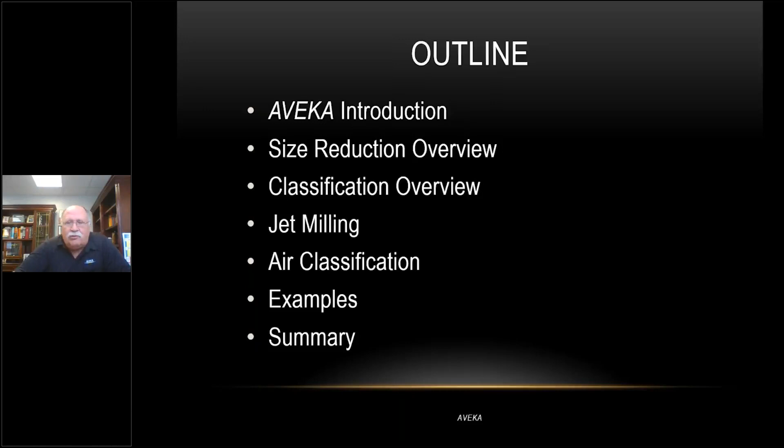So to get started, let's see if we can get to it. I'm going to give you just this outline. I'll talk a little bit about Aveka, just to give you more information about what we do, and why we're giving this talk. I'll give an overview of size reduction, an overview of classification. We're going to specifically talk about jet milling and air classification, and then I've got lots of examples for you to give you some idea of the secrets and tricks to get to those ultrafine particles that we're all interested in. So let's get started here.

Aveka Group, where I'm located right now, as Kevin said, we are a particle technology company that does contract manufacturing. We started in 1994, and typically in a year we'll have 300 customers in all of these areas, from chemicals to ceramics to aerospace to food. We focus on unit operations in our contract manufacturing and development processes.

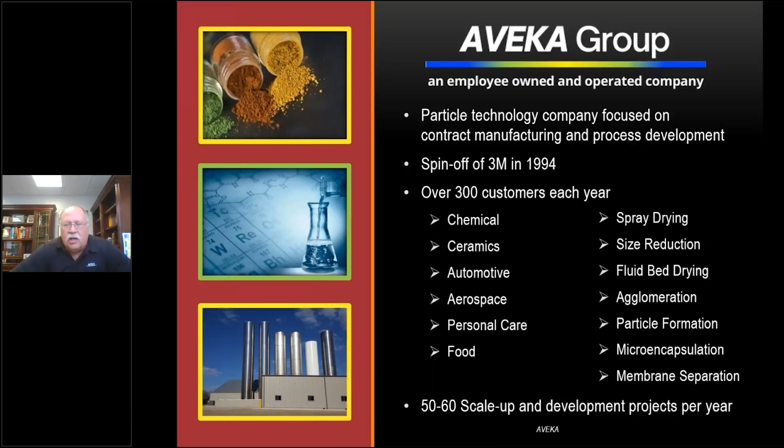Things like spray drying, size reduction—one of the parts we're going to talk about today—agglomeration, microencapsulation, membrane separation. Not only do we do contract manufacturing, but we also do scale up and process development projects. So many companies come to us and ask, how do I do this? What's the best way to do this? How can I optimize my process? So let's get started then.

Let's get right into this short overview of size reduction. We're going to be focusing today on jet milling, but realistically, there are lots of different ways of doing size reduction. If you've got big particles, rocks that you might want to start with, you're going to crush them. There's ball milling, hammer milling, and if we really want to get to the ultrafine particles, here's one of the secrets: jet milling gets you partway there, but bead milling, a wet process, would get you all the way there. Maybe in the future, I'll give another talk on bead milling.

When you're really looking at what process you want to pick and how you want to do it, it's all about a number of factors—what's the input size?

Obviously, I don't want to put a bowling ball into a bead mill—it doesn't work. What's my final size? Obviously, I'm not going to make submicron particles with a hammer mill. And what are the distributions, energy efficiencies, and size distribution efficiencies?

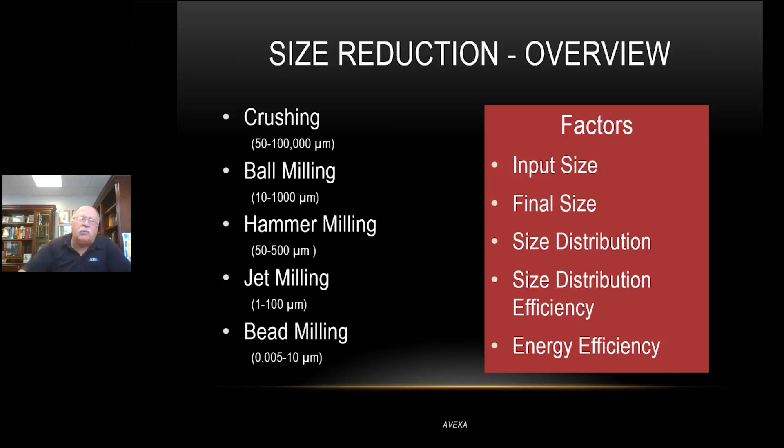Now, one thing I want to point out about size reduction—maybe most of you know this—is that it's an incredibly inefficient process. Maybe 2 to 4% of the total energy you put into grinding something actually goes into breaking particles. The rest goes into heat, into friction, or is just vanished into the ether.

This is a really interesting issue. So anything we can do to increase the energy efficiency from 2% to 4%—this is a huge increase. Doing this right makes a lot of sense.

In 1867, von Rittinger first came up with the idea of the theoretical amount of energy needed to do this, and he proposed Rittinger's law. That's the change in energy with respect to change in particle size, which comes up to basically a power law, and it really ends up relating to the increase in surface area. So Rittinger's law did a good job of explaining energy efficiency and usage.

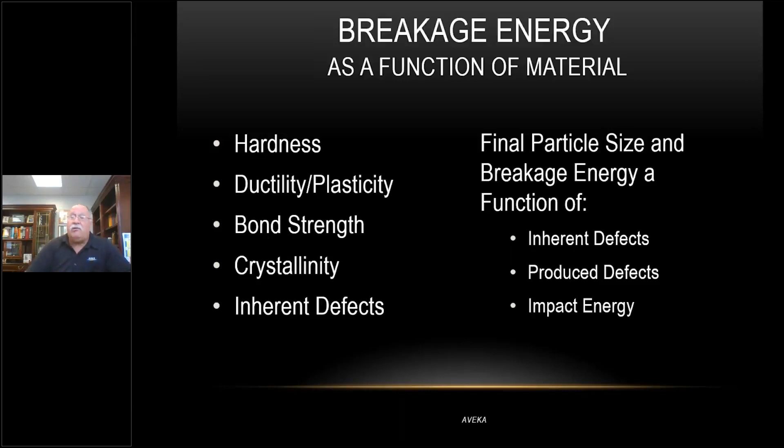Now, classification is one of these processes that goes hand in glove with particle breakage. I think we all know that when you break a particle, you don't necessarily get it broken into nice even pieces—it breaks into a wide variety of sizes. Many times those sizes are too small, and you're going to need to classify them out. So typically with most grinding processes, there's going to be a classification process that goes with it.

The way air classification works, it's all about balancing airflow against drag, combined with the offsetting effects of all these attractive forces, whether it's gravity, electrostatics, van der Waals, or magnetics. We're trying to balance all this out to separate these particles.

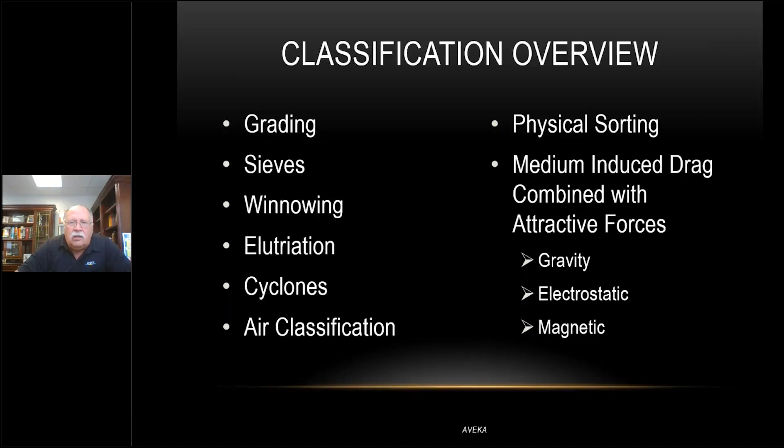One of the things we know about classification is it's not a very perfect process. Let's just call it that. When we use screens, even those aren't perfect, but with air classification, the efficiency depends on the classifier that you use and the materials you use.

Here's an example of jet milling followed by classification that we did on silica. What you can see is, depending on the rotor speed of the classifier, you can move to different size particles, from one size down to the other, by changing that rotational speed.

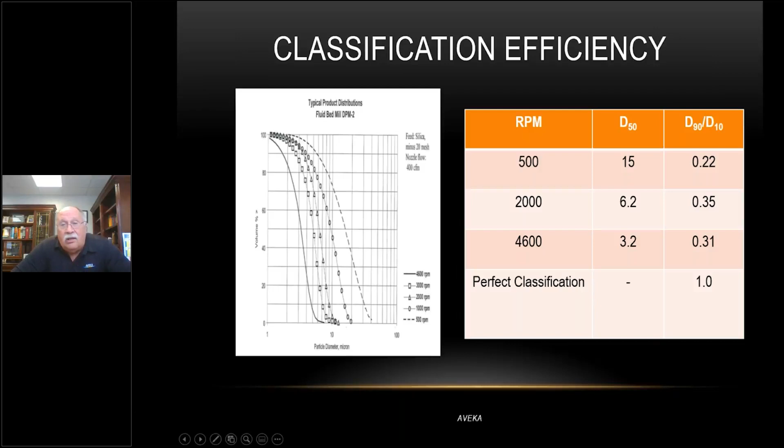The efficiency is defined as D10 over D90. The closer that number is to 1, the tighter the distribution, the sharper the peak in the particle size. If you have perfect classification, where everything is either above or below a number, you'd have a D10 over D90 of 1. We'll never see that. You can see numbers like 0.3, 0.2. This is not a great classification, but for this particular product, this is what we actually got.

So let's take a look at the jet mill types we're going to be talking about today. Jet mills are not a new technology, but they're not ancient either. They were first invented and proposed in 1917, looking at opposed jet milling, basically shooting particles at each other directly, using high pressure steam or air. In 1934, fluid beds were invented along with pancake mills, and finally Ovaljets in 1940.

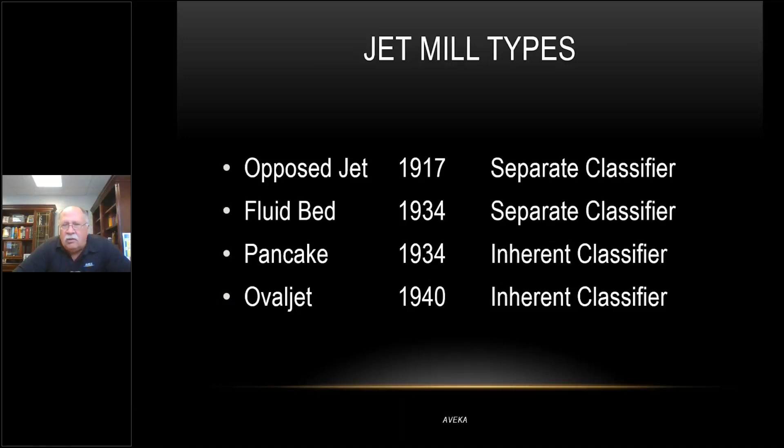The difference between all these processes is that the opposed jet and fluid bed always have a separate, unique classifier, whereas pancake mills and Ovaljets have an inherent classifier. I'll show you this in just a second.

With a pancake mill and an Ovaljet system, because the classifier is inherent to the system, you have some problem controlling that particle size distribution, and you end up with less control than you would have on a fluidized bed jet mill or an opposed jet mill.

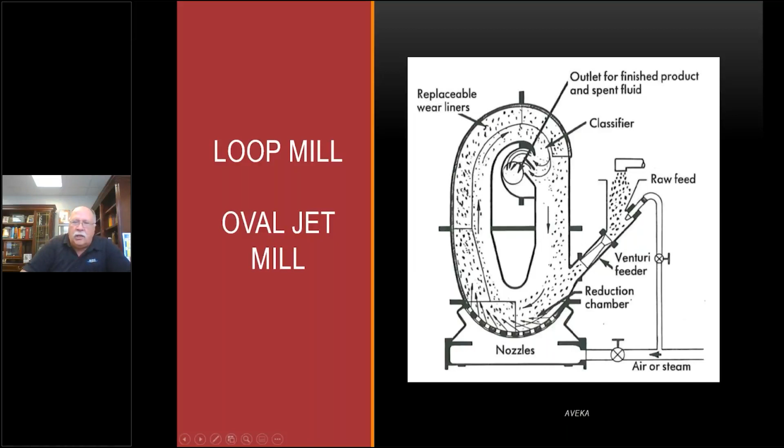So let's show you the schematic of a fluidized bed jet mill, which is what we'll be talking about today. AVEKA makes these mills, we sell these mills along with the classifiers that go with them. Basically you have a grinding chamber at the bottom where, in our case, we have 3 high pressure jets blowing into the system.

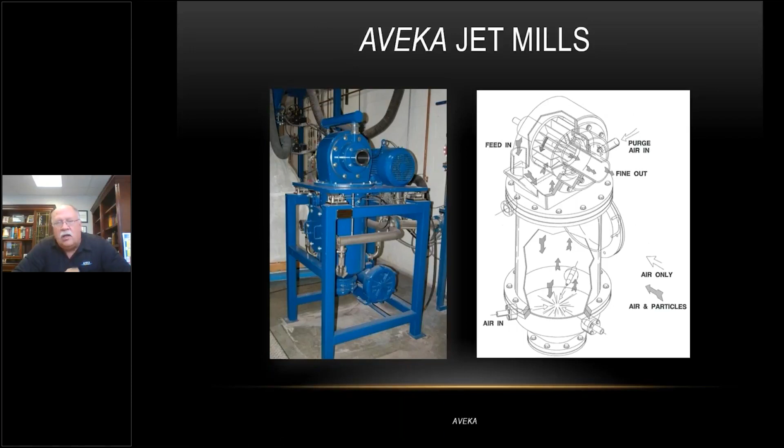The particles are loaded into this fluidized bed, grinding in this area, and when they get small enough, they're air entrained up to the top and go through this classifier, basically this rotating wheel. The smaller particles go through at higher rotational speed of the classifier, while the bigger particles get pushed back down to be ground up more. So basically you're removing the product, the fines, out of the system as fast as you can. This allows us to get a tighter cut and better utilization of the material.

Just to give you a little bit different view of this, this is a CAD drawing we have of the system. You can see right here the classifier wheel going into the system.

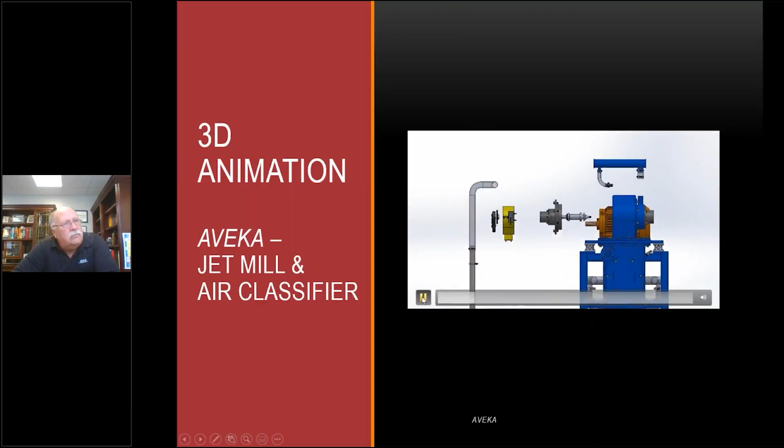And as it all comes together here, we're going to get this cross section. I just want to stop here. This is our classifier wheel, and as this spins faster, we can cut at a smaller particle size. If it spins slower, we're going to cut at a larger particle size.

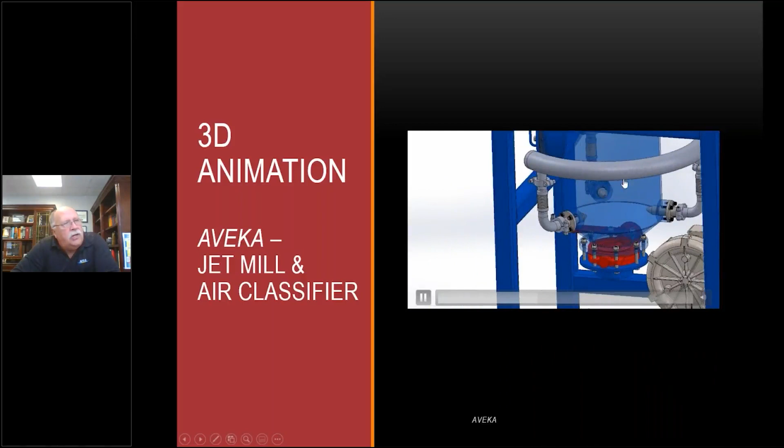If you actually allow this all to work, what you're doing down here is you're having your fluidized bed down at the bottom where the grinding is going on. The particles are coming up to the top, and let's just stop this for a second. Particles are coming up to the top and then leaving the system.

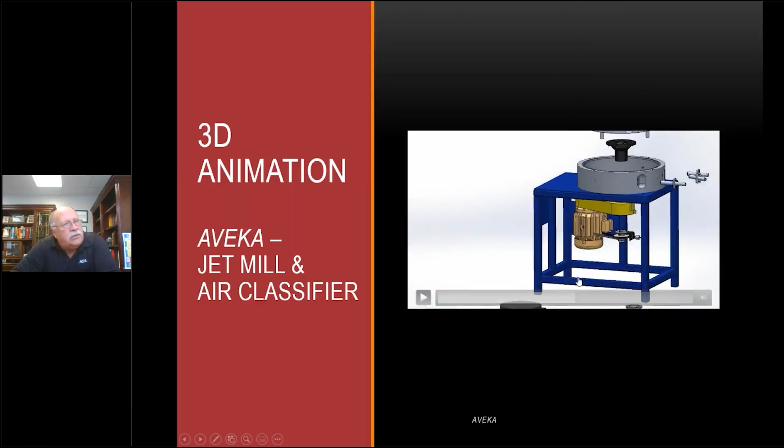Now this is a cross section of a separate classifier, and we'll just stop it. Oh, just didn't stop at the right spot. I never do this right.

We stop right here. What we have here is this is the classifier wheel, but instead of being vertical, it's horizontal. The same sort of idea. It's just a larger wheel, allows us to get tighter cuts, better cut action.

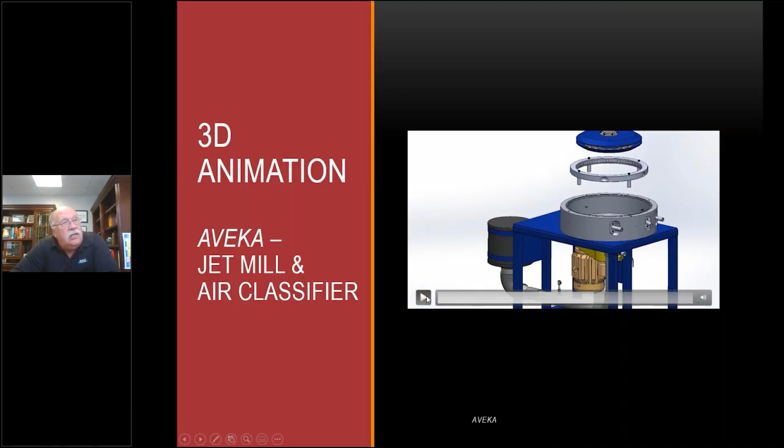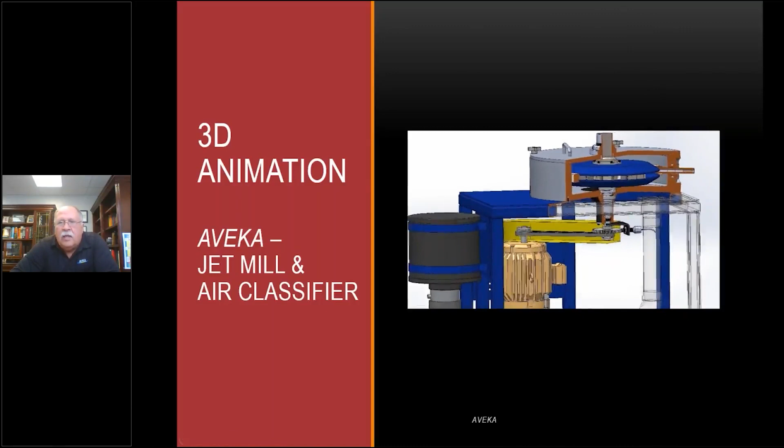And so this is the annulus ring that allows the particles to sweep around the system. And when they're small enough, they'll go through the system and leave the system. And just by changing the airflow and the rotor speed, it allows us to get the type of classification that we're actually looking at. So these are the jet mills and classifiers that we're going to talk about today.

The types of materials that you can actually jet mill that are commonly done range from ceramics to metals to glass to diamonds to food to carbon black to cosmetics. There's just about everything in the world, and I'm going to give you lots of examples in just a few minutes of some of these materials that we've classified.

The interesting thing about this, and I want to point out, things like the glasses, the ceramics, the diamonds, the minerals, these are highly abrasive materials. So we typically, jet mills will typically be lined with an abrasive resistant material. It could be another ceramic or it could be a polyurethane.

The other thing that gets interesting when you're dealing with things like polymers, drugs, carbon blacks, cosmetics, foods, these all have the potential to explode. And this is one of the challenges about jet milling and air classification, because you're making fine particles that are going to be more and more explosive as they get finer and finer.

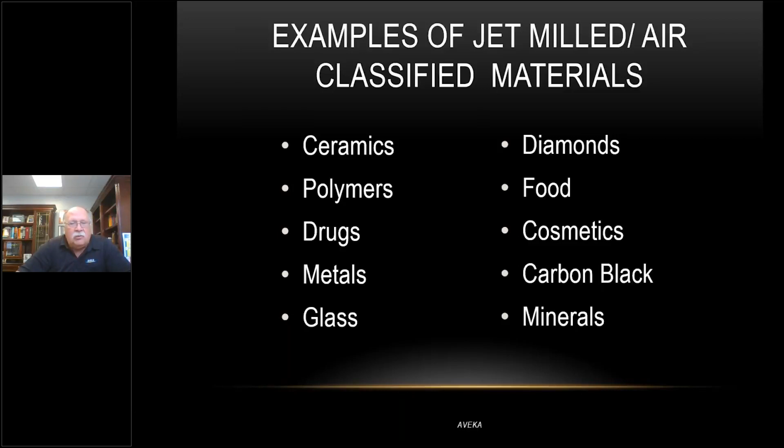So the way that people deal with this, this has been going on for quite a while now, is you explosion suppress the systems. Very difficult to do this in an inert atmosphere. I've heard of it, but typically jet milling air classification is done with explosion suppressed systems. So that's important that you realize that you can do materials that have inherent explosivity, that you can actually deal with them in these systems.

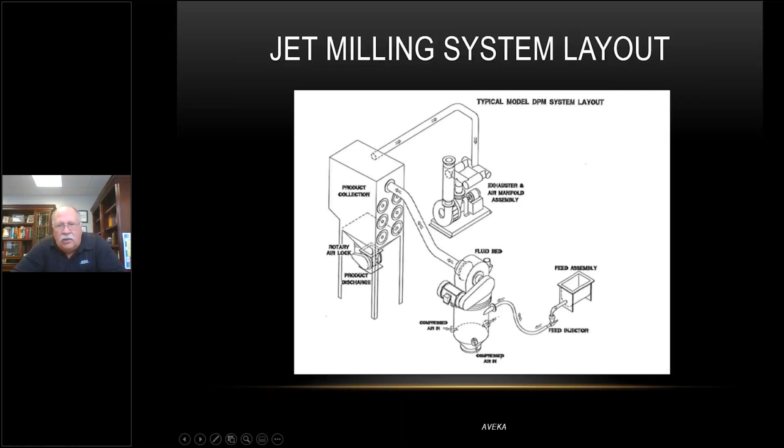What's important about this, what makes jet milling to me very interesting, is the way the system operates. It's all done under negative pressure. So the chance of materials leaking out, unless there's a process upset, are very small. So you can have very nice controllable environments for your workers to work in and not have this issue of a dusty environment. I really like these jet mills for that purpose.

This is a schematic of the classifier hooked up to an opposed jet mill, opposed dual jet mill. In this particular case, the particles that have been ground entered the classifier. They go around the system. The fines cut comes out here, and the coarse cut goes back in the system, and then you can add continual feed in the system.

This allows you to set this up without a jet mill, where you're just feeding feed in and then no recycle. It's just a way of having a double classifier on your jet mill.

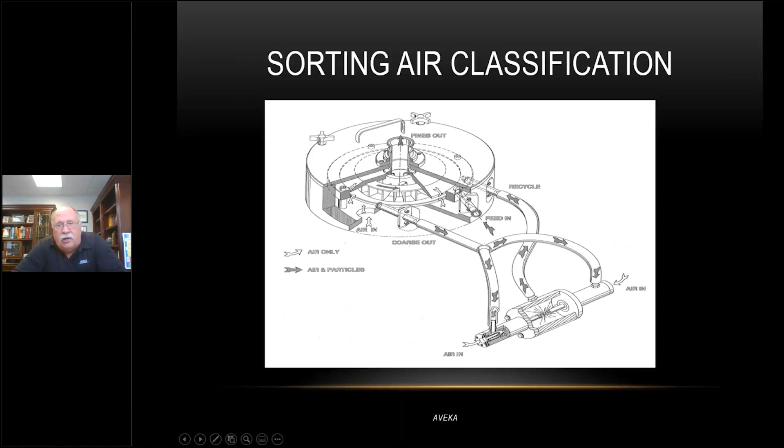So with all of that, let's actually look at some of the examples that we have here. I'm going to start out with what I consider the classic jet milling air classification combination. In this case, what we're going to do is we're going to take a starting material. This is a specific ceramic that's used in abrasives. We're going to actually take this 177 micron particle size particle.

This is the median size. And what we're going to do is we're going to grind this material at different conditions where we're going to remove the fines, the product that we want, and then classify it in the second step.

Once again, the coarse material that hasn't got down to the right size gets pushed back into the system and remains until it's ground down. The idea here is we're going to remove fines in a two-step process: first in the jet milling with the classifier, and then in a second step.

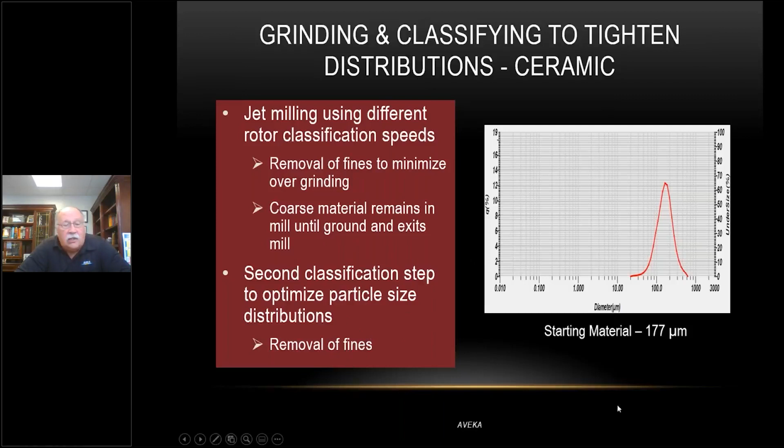So we're going to classify this again. When we went to a higher rotor speed—this one is at about 200 RPMs, and this one is at about 800 RPMs—the difference is we go from a 34 micron to a 14 micron cut, a little tighter distribution than we saw at the lower speed, but still too many fines on the end of this thing.

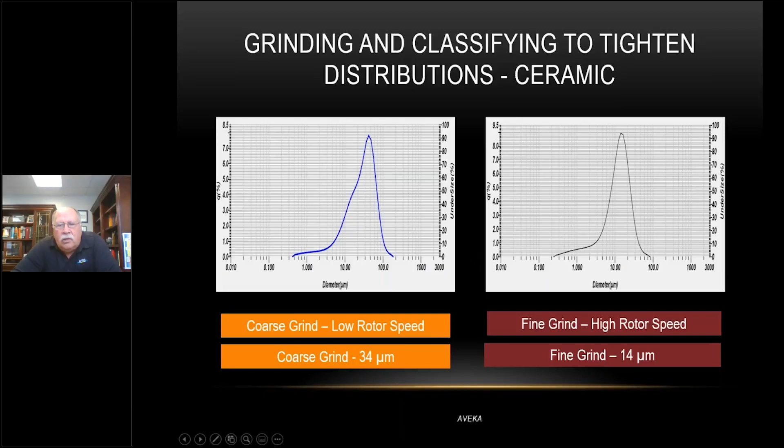If we go to the finer grind, with a higher rotor speed, we're classifying and doing more grinding on this system. You can see the particles have gotten smaller, but look at all those fines in there—it's an incredible amount of fines.

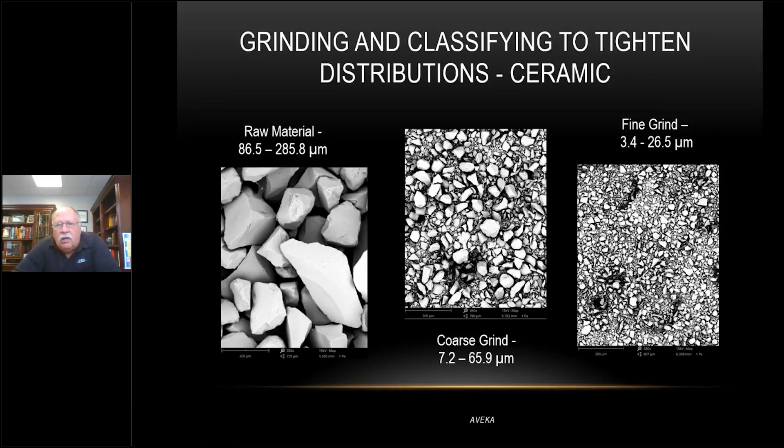Now you might ask, why didn't we grind at a higher particle size so we could get more product out of here? Because obviously we're cutting on one edge of the particle size distribution. The reason is that with abrasives, you don't want a lot of large particles. So you're going to get rid of the large particles, cut your yield down a little bit, and end up with a tight distribution like this.

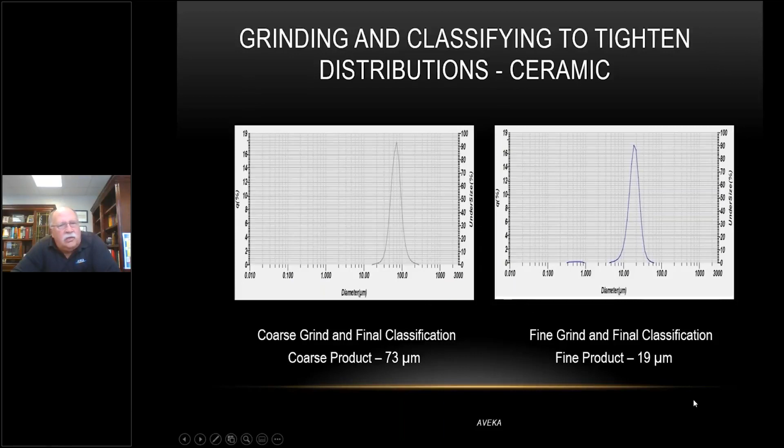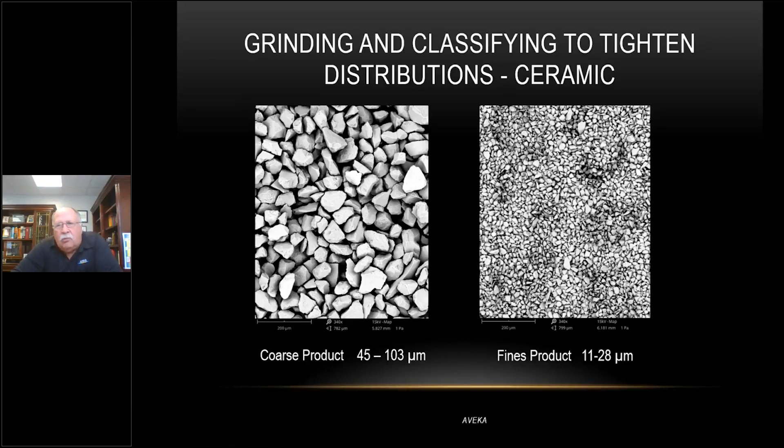Now let's take a look at something where we're just going to look at jet milling and compare it to a different technique, ball milling. So what we're doing here is grinding zirconia sand, a rather big particle to start with. And we're looking at what happens with a jet milling process versus a ball milling process.

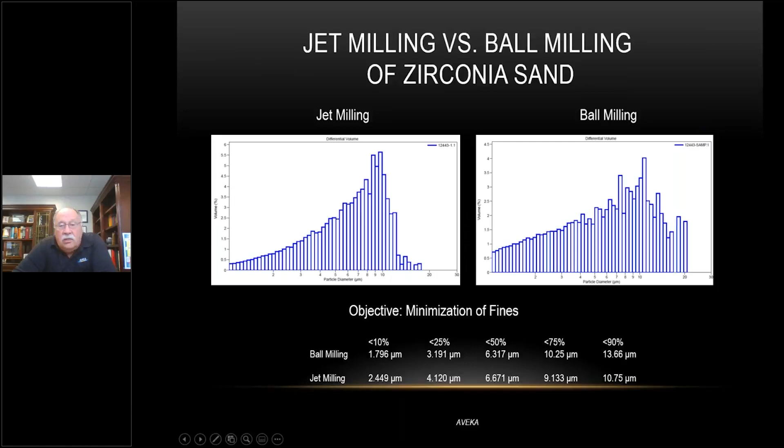So let's take a look at the SEM images here. Here's our sand—it really is sand, these are sand granules. And if you look at the ball mill SEM picture here, you can see we've got the right size, but lots of fines. So in this particular case, as opposed to jet milling, even though you could get the right size with ball milling, which is a cheaper process to use, by the way, I don't discount ball milling as a great way to do it.

But if fines were an issue, and they were in this particular case, jet milling turned out to be the better process. That's kind of given us this idea of why we would want to do jet milling if it is more expensive, but because we can actually control that size distribution and do a little better on that fines generation.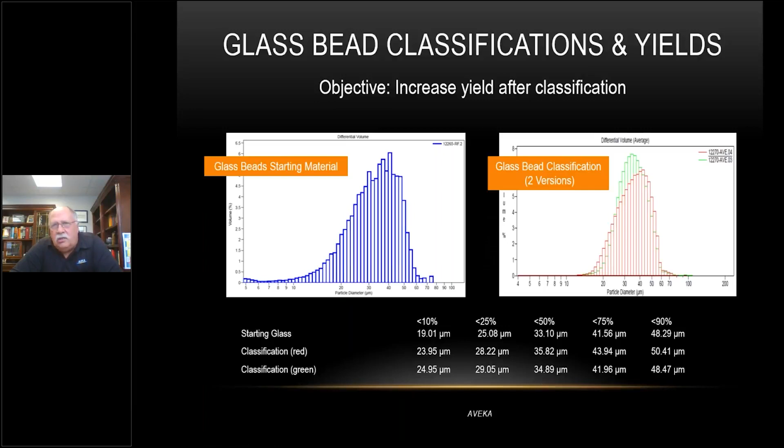If we go to a broad classification, and broad is really not that broad, we're going from 24 microns to 50 microns, about the same D50 particle size. And if we go to a tighter distribution, 25 microns to 48 - that's a 3 micron difference in the distribution of this product. We're cutting right in the middle of this thing, cutting this end off here. All we're doing is cutting just a little bit tighter in one versus the other. My first thought when we set out to do this was that we're really not going to see that much change in the yield. But let's take a look at the next slide and see what actually happens.

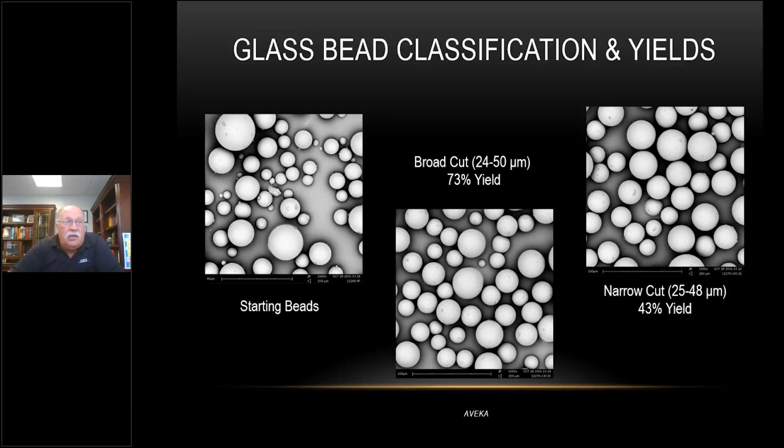Here's the SEM picture, so you can see the broad and narrow cut look about the same, maybe a few smaller particles in there, but look at the yield on the broad cut versus the narrow cut - a 3 micron difference is almost double the yield. I put this example in here for everybody to understand that being a little flexible on what process parameters you want, what final product parameters you want, can have an incredible effect on the final yields. Many times people come in having identified that they want this narrow cut and won't look at what happens if we just broaden it out a little bit, but the effects can be spectacular.

Well, let's consider grinding of a polymer. This is an engineered plastic used for additive manufacturing. In this particular case we jet milled the polymer, and I'm giving you 2 particle size distributions here - one is a volume distribution, standard volume distribution. You can see most of the product is in the size range we want, that 100 to 50 microns.

But what we found when we classified it, we still had to get rid of these fines because the fines just changed the flow characteristics of the material to an adverse effect. So we classified out the fines, and we did many different test classifications, and we got rid of the fines all the time. But we were getting all these variable results that we couldn't understand until we went and looked at the number distribution.

So instead of looking at the volume in each bin, we were looking at the number of particles. I do want to point out, in deference to HORIBA for setting this up, all these particle size distributions I'm providing here are done on our HORIBA systems. If you don't have a HORIBA, please buy one, they're great. But the issue here is that if I had one 100 micron particle and were to break it up into 1 micron particles, I would take that one particle and make 1 million particles out of it. It's an incredible change. And you can see that even though we have the big volume in the size we want, the number of particles in the fines is incredible.

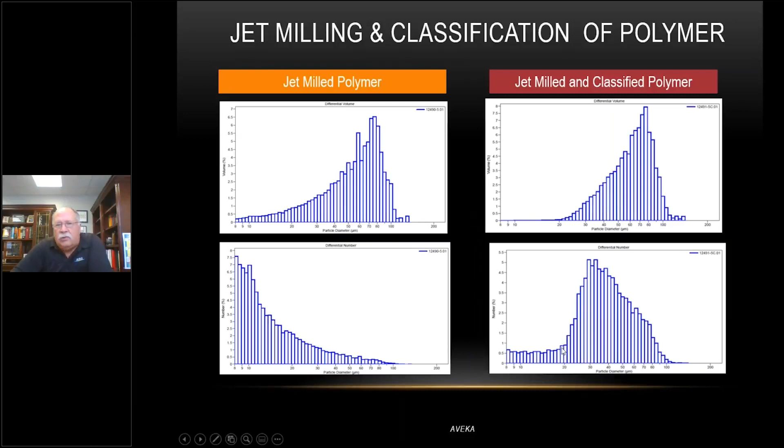And you can see we did that, and now we could actually differentiate what the jet milling and air classification processes that would actually give us the right number, the right functional results in the flowability.

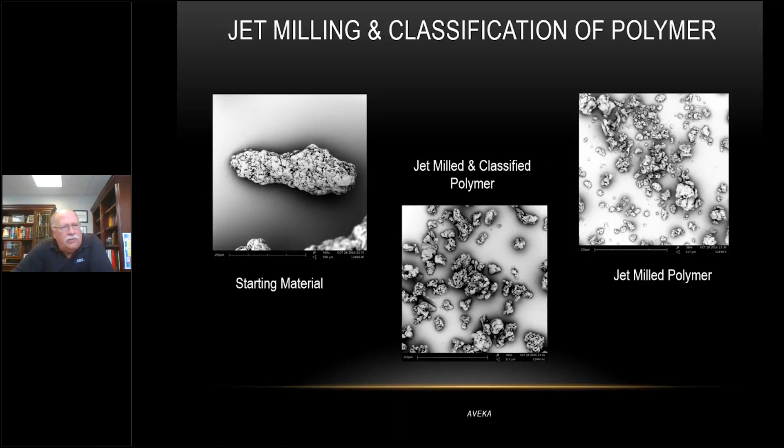So here's some SEM pictures of the polymer. This is a solution cast polymer. I always think it looks like a potato, and after we grind it up, you can see a lot of the fines in here. After we classify it, we clean out all those fines, and we get the product that the customer wanted.

Now, one of the real interesting things about all of this processing is that with grinding, many times you have to do this in multiple steps. This is an example here where we received sheets of glass, and these sheets are big, but they want it ground up to around 5 microns.

If we put sheets of glass in a jet mill, nothing would happen. So what we did in this particular case is we did a two-step process, a two-step crushing and jet milling. This is the type of crusher that we used. It's a finger crusher, and basically you pour that material in there, and those fingers just crush that glass up to get this feed material to our jet mill.

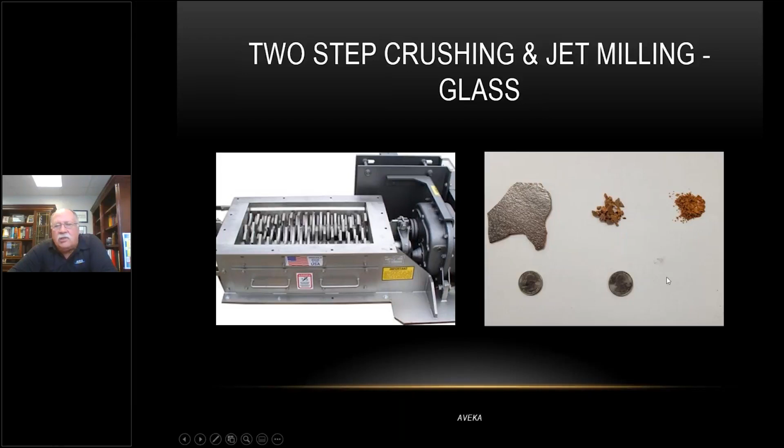Sheets that are much bigger than what you're seeing here - I mean, they might be feet in diameter - going to a nice feed that we can now feed into our system, ultimately to get the final product that comes out of here. What happens is by doing this, instead of it taking hours and days and years to grind up material, we can do this in a very fast and facile fashion.

So this is the results that we get. We were taking these big pieces of glass, grinding them down to a nice tight distribution, around 5.3 microns, and here's the SEM picture that we actually get in a situation like this.

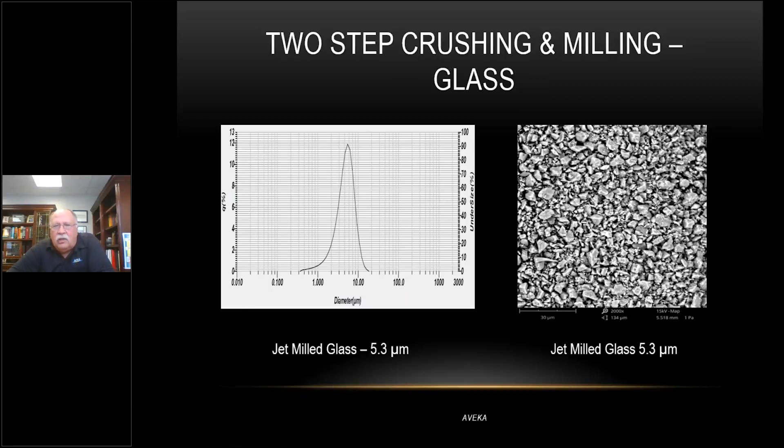So really, thinking about how you want to approach this, we have many examples where we're doing not 1, not 2, not 3, but sometimes 4 different grinding steps to get the optimum yield of the right size particle at the lowest energy usage. I have another example here just to show you another two-step crushing and grinding process where we were asked to grind up a carbon material.

And this is a carbon, and I'm saying carbon because it could be graphite, it could be carbon black, it could be a number of different things. These are used in battery applications where we first jaw crush the material.

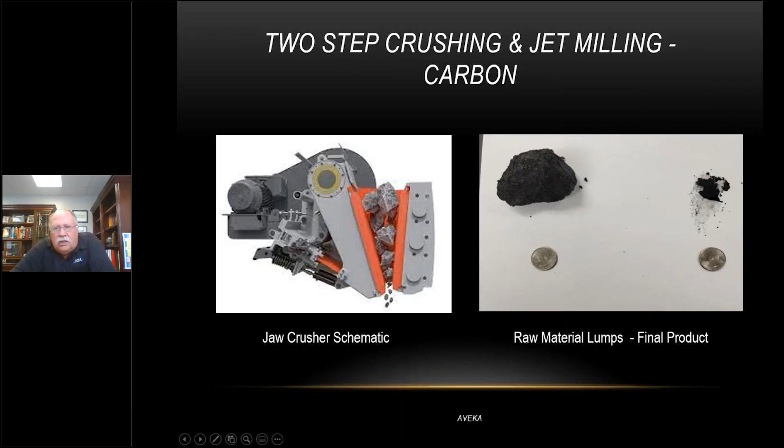It wasn't needed to be as fine. We could have actually ground it to a finer size and classified it tighter, but you can see that we've gone from things that you're not going to measure with the laser diffraction system to a nice distribution.

I just want to emphasize again the importance of having a good grinding process, multiple step, because otherwise sometimes it just doesn't work. Taking it stepwise is one of those true secrets that is in the grinding world.

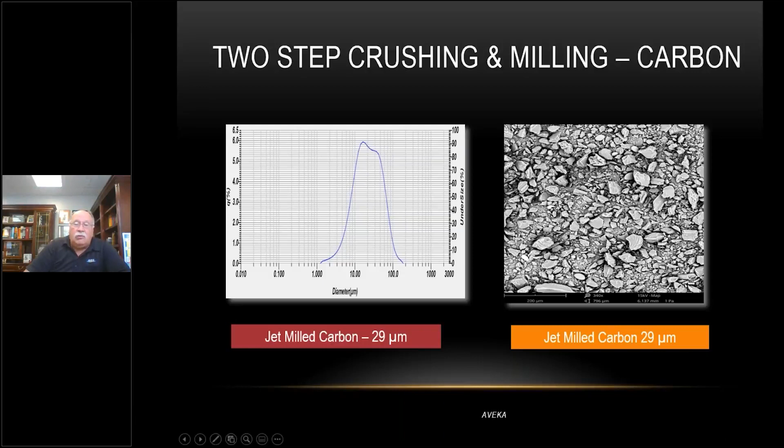But once again, there was a few too many fines in the system, and our customer wanted us to take the fines out, but really maximize the amount of yield that we have. So this is an interesting problem. Rather than cutting into the middle of the distribution, we're basically going to nibble at the edges. We're going to take out just as few amount of material as possible.

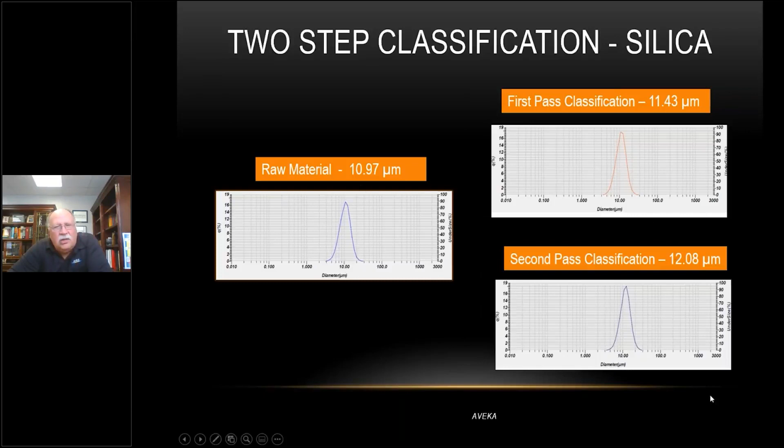As it turned out, we didn't get the result that we wanted. There was still an incredible amount of fines that were in there. So we did a second pass with the second little nibble on the system. And the results that you can't see here with the particle size distribution, I want to show you on this next slide. So here's our raw material, our silica raw material.

You can see a lot of the fines in the system. In the first pass classification, there's still fines in there. This was kind of surprising. We thought we'd get most of those fines out, but with the second pass classification, we took out all the fines. I think this is one of the real challenges of particle processing, and I want to spend a little time on this to impress upon all of us the difficulty of particle processing, and in this particular case, this classification.

Inherently, logically, we would not expect to see this big change from the first and second pass classification, and yet it happened. We see this again and again in particle processing. We find that the fines inherent in almost every material almost need to be stirred up again and again. When you do dry powder flow measurements, you see the same effect. Here we're seeing it in grinding. I'm not sure I completely understand it, and I'm not sure the people who do flow measurements completely understand it either, but I can guarantee this is one of the big issues in particle processing.

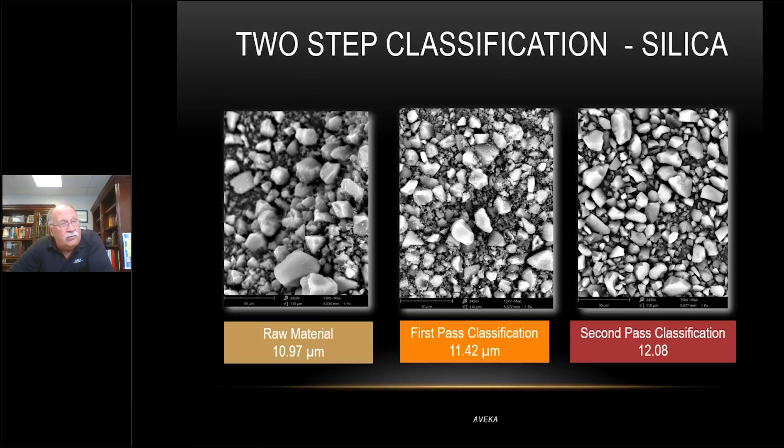Here we have visual affirmation of the importance of maybe trying it again and seeing what happens if you stir it up. In this particular case, the change of fines from the first to the second pass, I think, is incredible.

So finally, my last example that I want to give you is completely different. We're going to compare ball milling and jet milling, but grinding up fibers. This was an interesting question for us. A customer came to us and asked, what happens when you grind up cellulose with a ball mill, and what happens when you grind it up with a jet mill? One would think you're going to get a smaller size, and that's what we want.

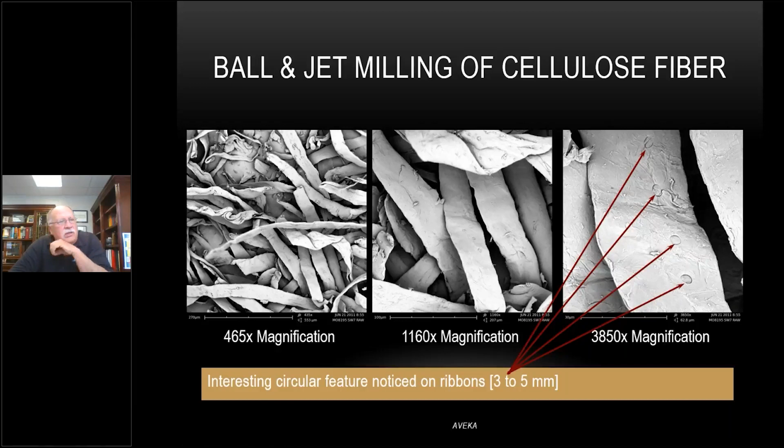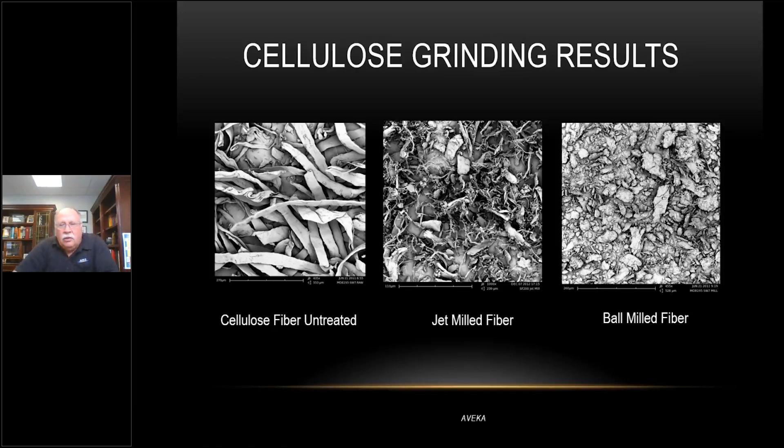Optimization of the processes might require you to do a couple steps. This is one of the big secrets of all of these things, how you're going to get this, whether you might need 2 grinding steps or 2 different grinding steps, or you might need to classify once or twice or 3 times in order to get what you want.

The final results, I think we've seen this with the different materials, incredibly material dependent. I mean obviously with the fibers it is, but even on the ceramics, the glasses, the polymers, each of them you have to kind of work your way at.

And I'll just leave you with this final thought, that you're going to need some tricks to really get this thing to understand, to get that optimum final product. And what that trick is, who knows, because it depends on what functionality you're looking for, what distributions you're looking for. But it's one of the things that makes grinding and classifying really worthwhile.